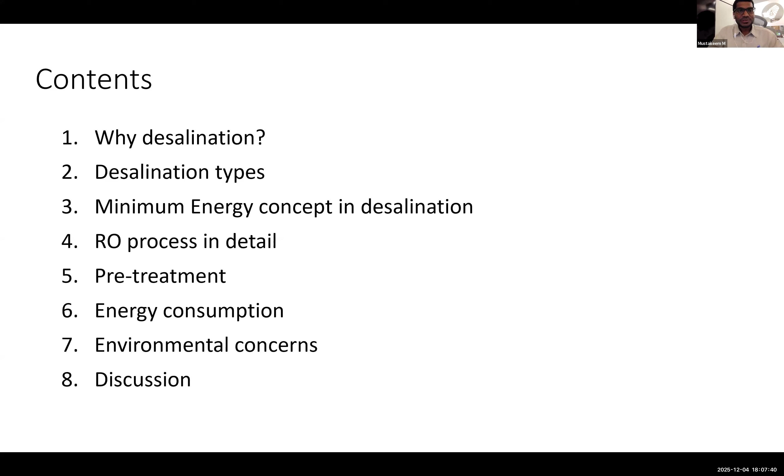So as Dr. Rawal already mentioned, we have water concerns everywhere. Some of the lands geographically don't have water themselves. So there are multiple reasons, and there are some places which previously had water, but they are now becoming water scarce regions. There are multiple reasons, for instance, population growth, industrialization, climate change. As we know, there is a decrease in the normal rain patterns, and also the water table is going down and the water quality is going down.

So what are the ways that we can get drinking or potable water for us? One of the possible ways scientists recently explored is desalination. What it means, in the right side of the picture, you can see 96% of the water is ocean water. We can take advantage of that water to get potable water for us. And this is the process we call desalination. The seawater is very heavily salted, and then we remove the salt and we use it for our purpose.

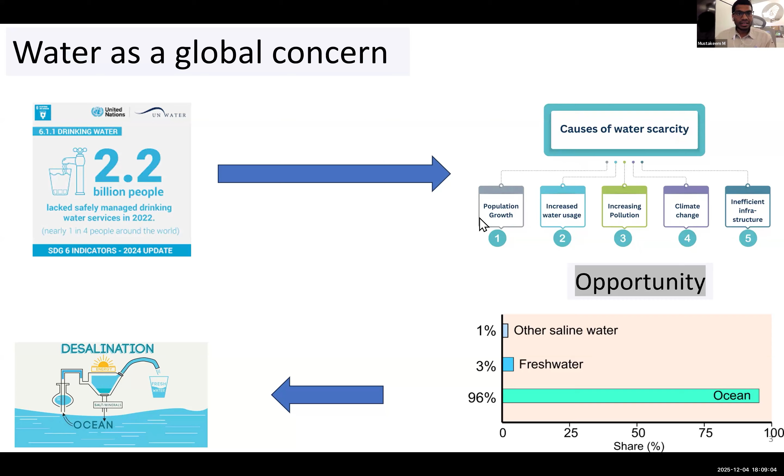So in seawater, we have around 3.5% salt. What it means in terms of milligram per liter is 35,000, or sometimes 45,000. For instance, the city I'm sitting in right now in the eastern province of Saudi Arabia reaches salinity until 50,000 ppm, so milligram per liter.

So there are a lot of variations in the water composition. But what is important here is that there are some kinds of salts, specifically sodium chloride, which basically mix with the water. It is a soluble salt, and we have to remove it, because it makes a coordination sphere with water, so it has to be chemically separated from water.

It cannot be filtered. So there is a difference between filtration and desalination. Filtration means you filter out something which is visible or physically present, not chemically dissolved in the water. You can see on the right side, the sodium atom is bonded with multiple water molecules. So if we move water, sodium automatically moves with water. We have to find a way to keep the sodium away and only move the water.

So the first approach, which I put at the bottom, is the thermal approach, which we were using till the 19th century, or I would say the middle of the 20th century. This is thermal, we call it multi-stage flash or multi-effect distillation. It was very much used in different versions.

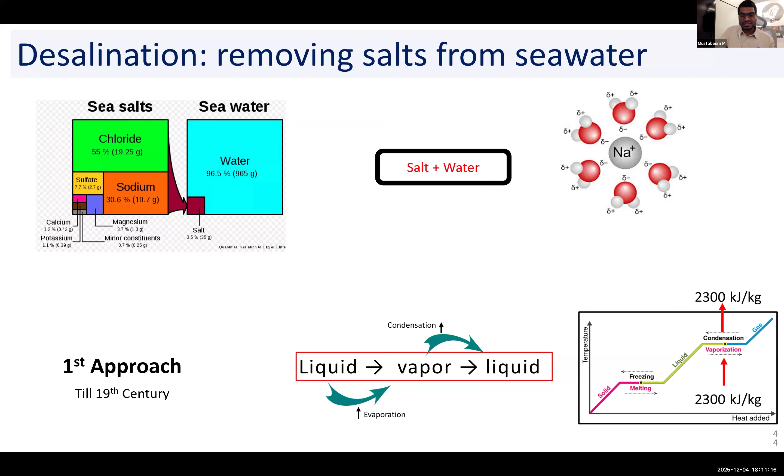Now the second approach, which we are focusing on today, is reverse osmosis. We call this a physical process, physically removing. It means we push the water through a membrane, we call it a selective membrane. That membrane is the reverse osmosis membrane. If you see reverse osmosis here, it is a type of osmosis where we have two different kinds of salt concentration in between.

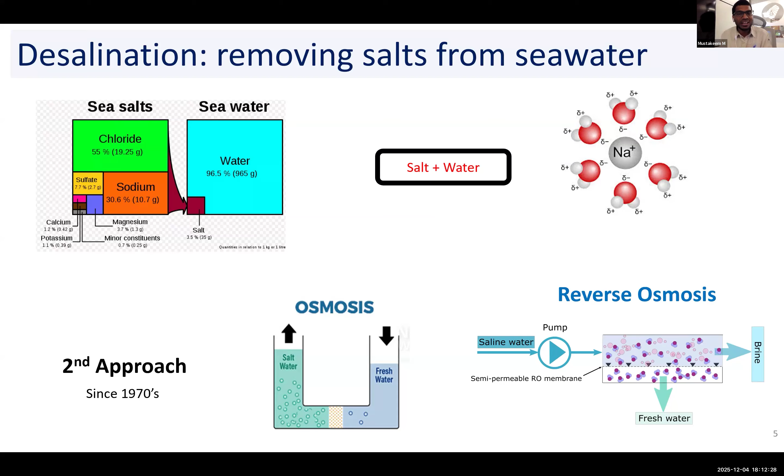In general, there is a natural diffusion of molecules from one side of the membrane to the other side. On the right side, we have a pump and a membrane. In reverse osmosis, we reverse the process of osmosis. Osmosis works from the higher concentration to the lower concentration, so we reverse the process from lower to higher concentration. There is a lot of salt in the seawater, and naturally it would move to the other side, but we allow the water to move to the other side.

Now because the membrane is a very big aspect of this whole process, let's see what the membrane in RO is. RO membrane development has basically two phases. The initial phase started with the cellulose acetate membrane. We call this cellulose triacetate membrane, or CTA. The CTA membrane started early, and then later we have the TFC membrane, which we are using at present.

So this cellulose triacetate membrane is a dense layer over just a surface. It is a completely dense layer, and it has somewhat low permeability and also low rejection, meaning the water comes out a little bit more salty. So we need multiple passes of water. However, it has a very good characteristic: it fouls a little bit less compared to the thin film.

The thin film membrane is on the right side at the bottom. You can see it has three layers. One is the support layer, then a polysulfone layer, and over the polysulfone layer we polymerize a polyamide layer. It is called interfacial polymerization. People who work with membrane synthesis understand how interfacial polymerization works.

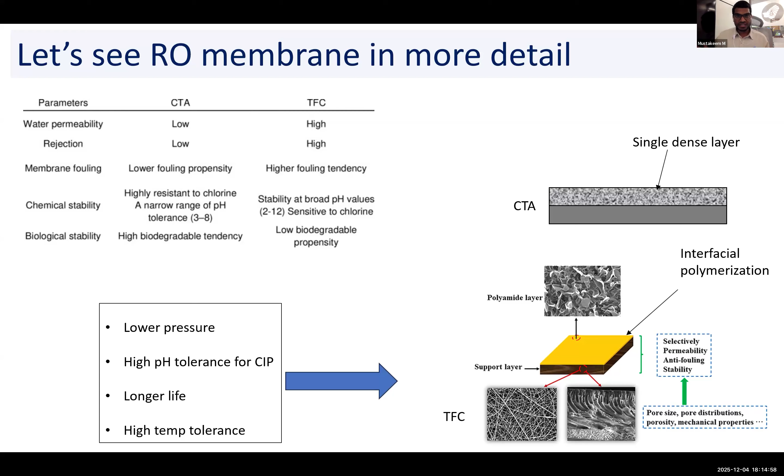I will explain in the next couple of slides that it can reach up to 45 degrees Celsius. Otherwise, this CTA membrane cannot reach 45 degrees. It has a little bit of issues with the rejection.

Now okay, this is the minimum energy concept. I will try to summarize these two concepts of the thermal and the RO process in a single slide, although it is a very big academic question, a very nice question we generally solve in thermodynamics. So in thermal desalination, what is the minimum energy, and why the RO? We can say minimum energy consumption in RO is much less than the thermal. Why do we say that?

If we consider the thermal, as I mentioned earlier, in thermal we have to evaporate water from the liquid stage to the vapor stage, and then back to the liquid stage. There are two thermodynamic processes happening right here. One is evaporation, which is around 2300 kilojoule per kilogram. Then there is another process called condensation. So if you sum up both processes, I calculated it at the top,

it is around 2256 megajoule for 1 meter cube of water, and if we convert megajoule to kilowatt hour, for 1 meter cube of water you have to spend more than 600 kilowatt hour of energy. Regardless of whether it is thermal or electrical, we don't go into that detail right now, just think about the energy. Go to the right side, which is the RO.

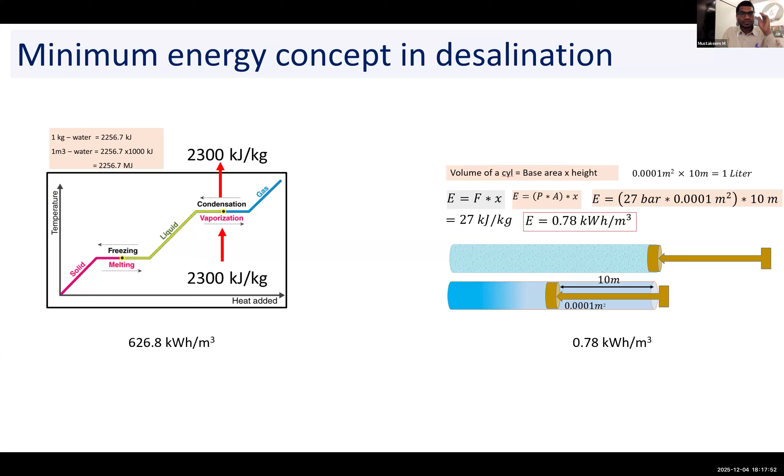However, we still say the thermal process is more efficient in specific cases where the thermal energy, the heat energy, is free from many industrial processes. I will describe these two concepts in detail in other slides. Now let's focus on what matters in the process.

We simply say reverse osmosis, but it's really a big process, and the RO itself is a very small portion of the whole process. We have a lot in the upstream and also the downstream. Downstream there is one process we call post treatment, which I will not describe today. But upstream has a lot of processes, which I will explain as pre-treatment, until the water reaches the feed pump of the RO, which we call the high pressure pump.

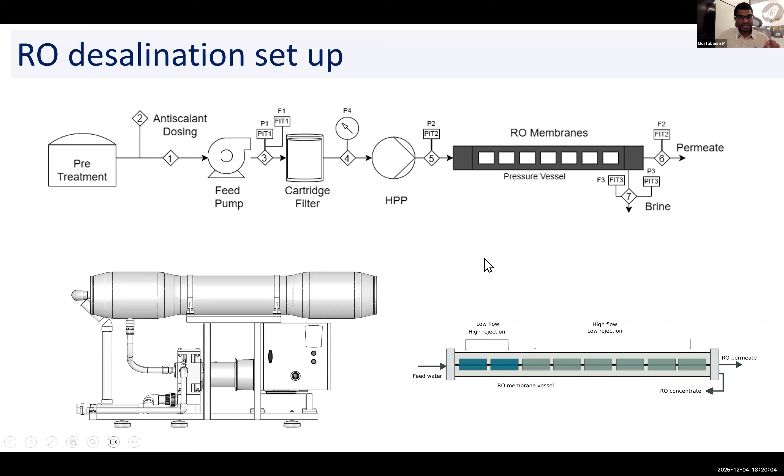And then in the beginning, what happens? There is another problem in the beginning, the biofouling. The microorganisms start to foul the beginning elements. So the two problems of fouling: the biofouling takes place in the beginning, and the scaling takes place in the last elements.

Now let's start. RO process is of two types basically in our scenario. Most, I would say 80% of the RO process is still seawater RO. We call it SWRO. But there are a lot of stations, a lot of facilities, specifically in our Indian context, a lot of shops, they have an RO process. We call it BWRO. We don't say SWRO. It's a BWRO because the water quality is a little bit less than 10,000 ppm of the salt.

Now how do we distinguish these two processes? Basically, SWRO and BWRO are distinguished by the membrane. So the SWRO membrane is a little bit tighter, because it has to cope with the high strain of the salt, and also a lot of pressure we have to develop with SWRO. However, BWRO can run with less pressure, sometimes 20 bar, sometimes 10 bar, any such range of pressure. That's why it's basically a loose membrane.

And also, if we see in the bottom, in SWRO our TDS is more than 30,000 ppm, we focus on pressure more than 40 bar, and the recovery is less. What does recovery mean? The water recovered is less in SWRO, and basically the pre-treatment system is relatively simple, although it has more constraints. I will explain later.

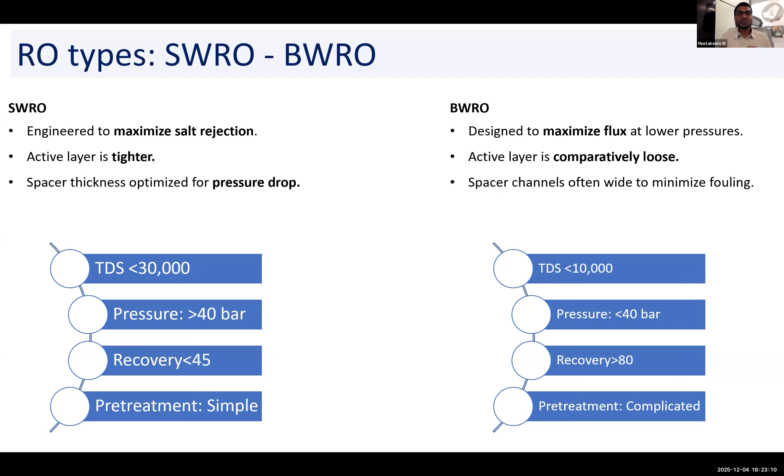And I would say that the pre-treatment stage for BWRO is more complicated. Although you see a little bit less constraints, if you look a little more on the higher scale, the complication comes from the divalent ions, and also a lot of silica, for example. Silica I will not cover in today's session, but silica is the main problem for BWRO, where silica forms very insoluble scales.

Now, as I mentioned, the feed is very important in the previous slide. So there is a specific requirement for the feed in SWRO. One of the things is the turbidity. The turbidity we measure in terms of an index called SDI, silt density index. So if the turbidity is very high, we don't use the RO directly. We do pre-treatment. So there are some parameters which I put, the requirements for SWRO. SDI should be less than 4.

TSS is the suspended solids, so it should be less than 1 ppm, 1 milligram per liter. And the organic contents, because organic content is very important. If we have higher organic contents, it will cause the membrane to foul much earlier than we expect. And the chlorine, very important. Generally, chlorine is dosed in the intake of the RO system just to prevent bacterial development. However, it has to be removed before the RO process.

Otherwise, chlorine is a very strong oxidant. It will damage the top layer, which is the polyamide layer of the RO membrane. That's why we have to remove it. And the particle size of the suspended solids should be less than 10 micrometers. This is the reason we put a safety filter before the RO. We call these cartridge filters.

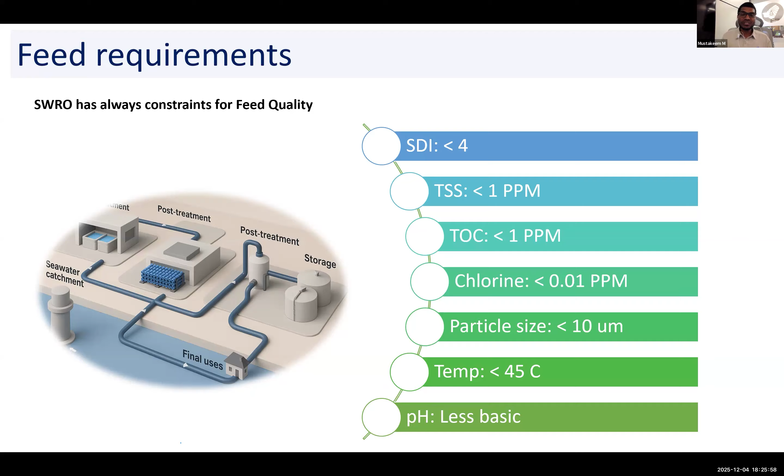And the pH plays a very important role here. As you know, higher pH increases the precipitation. So it should be around 6 to 7 pH. This 6 to 7 pH is very good for RO, because it allows the maximum of the salts to be in the dissolved form. It means the solubility of the salt remains in a good condition if the pH is between 6 to 7. If it is above 7 or 8, the salts start to precipitate.

Now this is the whole process again of the pre-treatment. We take the water from the sea and we dose the chlorine right away at the intake site, and then we do the screening. Screening means we don't want fish and many things to come to our intake site, so we do some kind of normal mesh screening. This seawater has a lot of suspended solids that we need to remove but cannot remove by the screening. It is like a coarse screening.

Now we put some coagulants like ferric chloride. Right now people also put some polymer-based coagulants, but ferric chloride is the gold standard people use in the industry. We put like 1 to 2 ppm and it coagulates, and then we go for the DAF. DAF is dissolved air flotation. After the coagulation, some particles will float over the surface and some will settle down as sedimentation, and DAF will allow them to separate. Then we still need to separate using some filtration. DAF is not a filtration; it is just separating based on buoyancy, basically density. Filtration has to be done by some other process.

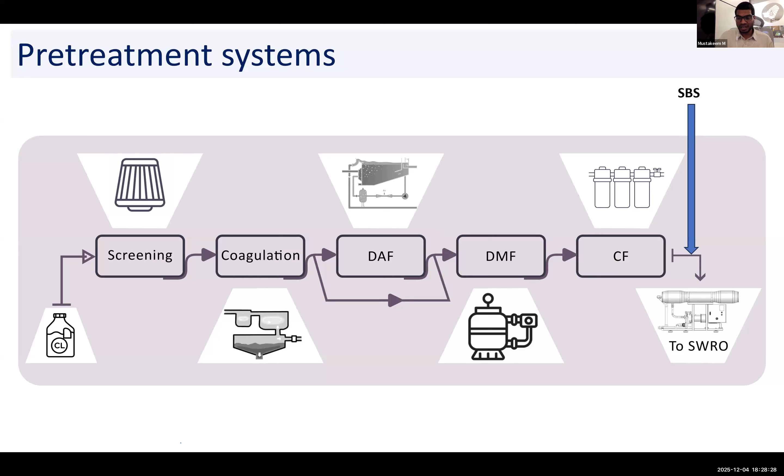Here we use media filtration, specifically dual media filtration. Dual media filtration means we have two media. One is the main media, we call it sand media. Another is the supporting media, we call it anthracite or activated charcoal. And then we have the cartridge filter. As I mentioned earlier, the role of the cartridge filter is sieving; it allows only particles less than a particular size. Previously the membranes from LG, GE and DuPont allowed 10 micron filters, but recently DuPont or Toray membranes from Japan require 5 micron filters. So there are 5 micron cartridge filters before the RO, and then we have the RO process.

Okay, now in terms of the process, most commercial plants run with a fixed recovery ratio. What does it mean? They know the consumption of the city, for example 100 cubic meters per day. To get this capacity, they have to run their desalination plant. It means they have to fix the output. We call this fixing the recovery rate or recovery ratio. After that, what is changing? If we fix our output, what is changing is the pressure, of course. So the feed pressure on the left side is changing. If we are increasing the recovery, we have to increase the feed pressure.

And why? Because every day the foulants are increasing. Actually, the RO process is not very often cleaned. It is cleaned with a very big cycle, maybe 3, 4 or 5 months, depending on the pressure drop we develop. Because of that, the foulants start to stick on the RO membrane. So the feed pressure has to increase to meet the same quantity of output, and this comes with energy consumption.

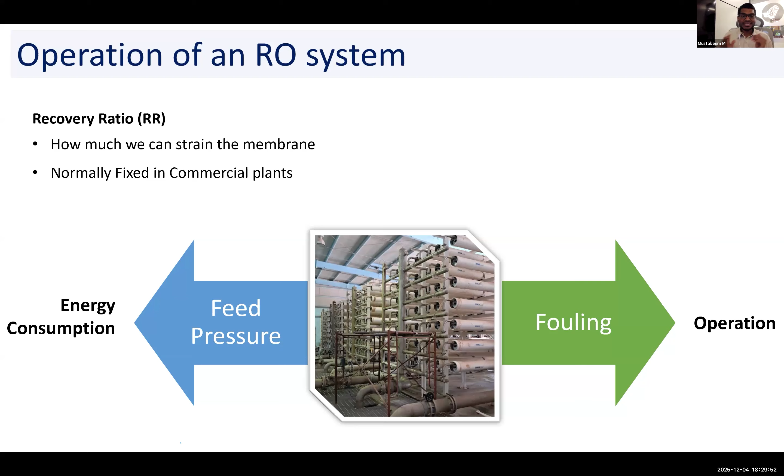Now, if we consider our energy consumption, what are the components which consume the energy in RO? There are basically 3 components on the left side. One is the high pressure pump, which is the main consumption, taking around 30 to 40% or 35 to 45% of the energy. Then we have the pre-treatment system and the post-treatment system.

Together they have the pumps, they have air scouring; combined, the pre-treatment and post-treatment are around 10 to 15%, up to 20% of the whole energy consumption. Then we have the utilities. In utilities we have the automation, controls, valves, a lot of the SCADA system, and also the clean in place, because as I mentioned, we clean membranes after a certain time, and we have the cooling system of a lot of pumps and some other stuff. So everything will consume energy.

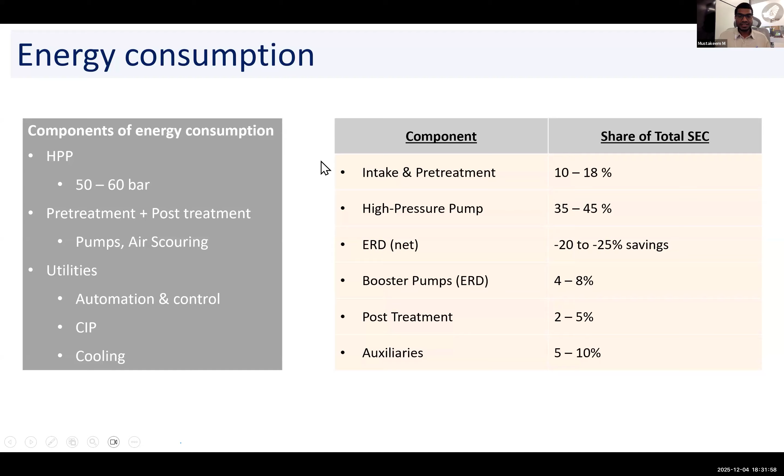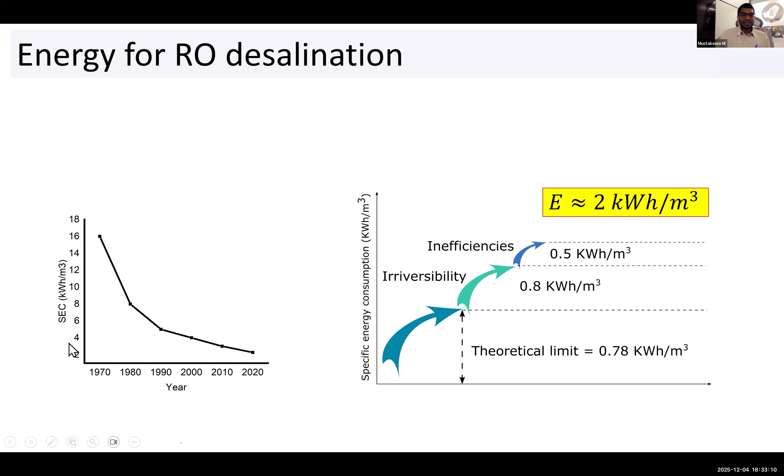On the left side, we see the specific energy consumption starting from the 1970s. Actually, the RO process started in the 1960s, but its commercialization started in the 1970s. In the 1970s we had around 15, 16 and 20 kilowatt hour per meter cube, and it dropped very drastically. Even after 2000, when the polyamide membranes were discovered, it dropped further, and in 2022 and even 2025 we are reaching very close to 2.

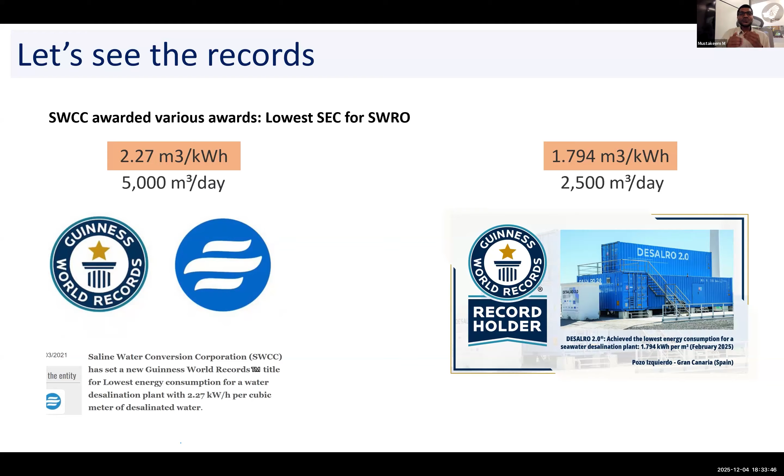Now there are some records of minimum energy consumption in the world. The first record goes to our organization, SWCC, Saline Water Conversion Corporation, and it was, I think, valid until 2025, when recently in Spain another desal RO project went down to 1.7 kilowatt hour per meter cube. I will explain in the next slide what the main constraints are that bring this energy to less than 2 or very close to 2 kilowatt hour per meter cube.

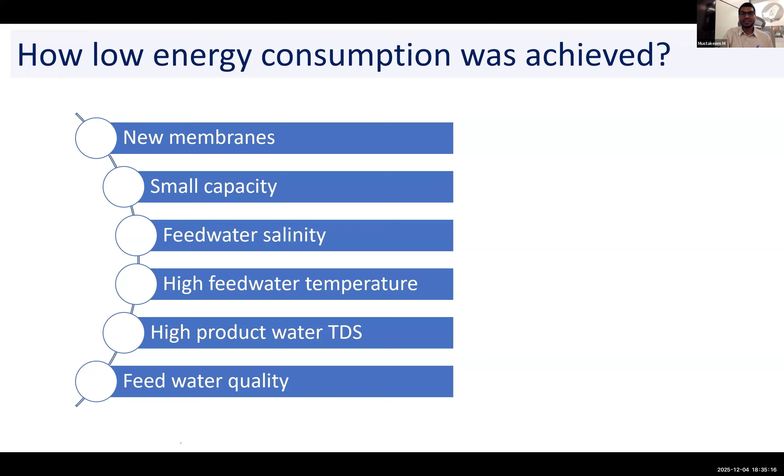Now I have a couple of slides before I close on environmental concerns. What are the environmental concerns of desalination? If you see, desalination produces 3 things basically.

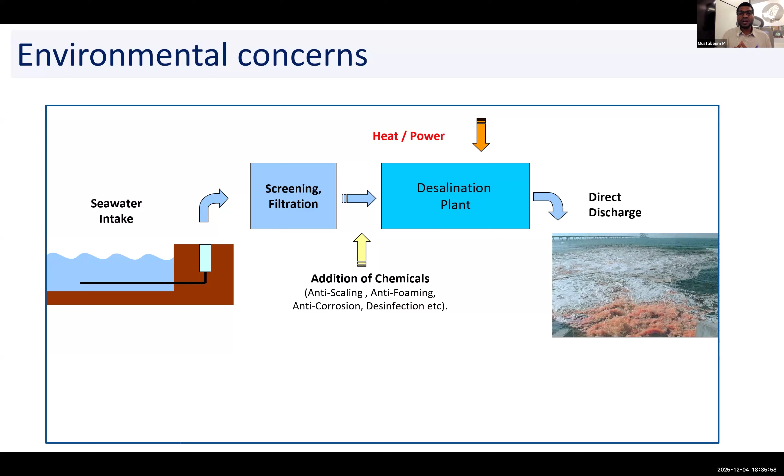Number one, it produces brine, which is higher in salinity. It produces some of the chemicals which we use in the process. Third thing, it produces the heat of the machine. Even RO, it's not a thermal process, but still it produces heat. But if you consider the thermal processes like MSF and MED, they produce an enormous amount of heat. So now how do we have to discharge it? Let me go to the next slide, then I will explain.

So this brine, which I explained in the previous slide, has to be disposed of in the sea, and there are multiple ways to dispose of it. But let's see what the concerns are right now. Actually there are a lot of studies. I give my opinion, my viewpoint. Definitely in the audience there are a lot of other opinions, but in my opinion, this saline water has to go back to the sea.

And my own understanding is that it does not drastically change any of the marine habitat or the marine environment. So definitely there are concerns, but I would say this is a pinhole amount of water we are putting. See the surface area, see the evaporation taking place every day from the surface of the sea. It is increasing an enormous amount of salt in the sea. Then we put a tiny amount of brine in the sea. This is my own understanding. It may not be fully correct based on different scientific findings.

Now, there is also the way that chlorine may go to the marine environment. It may damage the local environment, because chlorine is not good for our environment. And also I will put radioactive nuclides here. Why? Because if we take out the water from very deep in the well, it naturally has some radioactivity: radon, strontium; very often we find radioactive strontium. We may discharge this radioactivity somewhere, and it can get concentrated, not enriched but concentrated, in some of the brine.